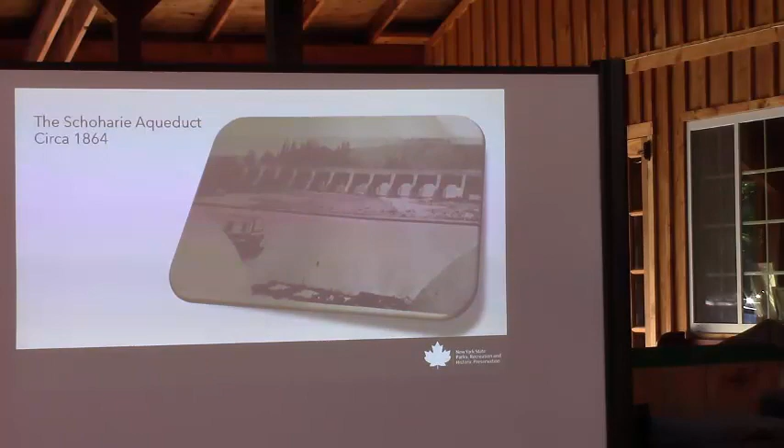The aqueduct was completed in 1842, but put into service three years later in 1845 — I actually meant to look up why that was, it took them three years to put it into service, but I haven't done that yet. It was part of a major statewide modernization of the Erie Canal. It was 624 feet long with 14 arches, the third largest in the Upper Mohawk. The sister aqueduct, the Rexford Aqueduct, was around the same size and dimensions, and there were other major works like this on the canal between here and Buffalo.

We were at a point in saving the aqueduct, and it was critical — we didn't know how much longer the structure would last. It was amazing it lasted as long as it did: six surviving arches, the trunks, the piers. But there was something of special significance to many of us that we wanted to save in situ in particular. I'm sorry the contrast isn't great here, but it's the Otis Eddy stone up on the towpath, part of the capstone of Pier 6. When we get later in the slideshow, we'll see how close that was to falling in.

Canal boats would originally cross the creek on a windlass system, and then there was a bridge that the mules could go across. But having a proper aqueduct and towpath meant no time was lost crossing Schoharie Creek ever again — a major upgrade to the canal system. I mentioned the dangers of the original canal at Schoharie Creek, and there was a newspaper article that said even the most experienced canal boat captains dreaded having to cross Schoharie Creek, even when it wasn't flooding. So this was one of the major upgrades to the canal.

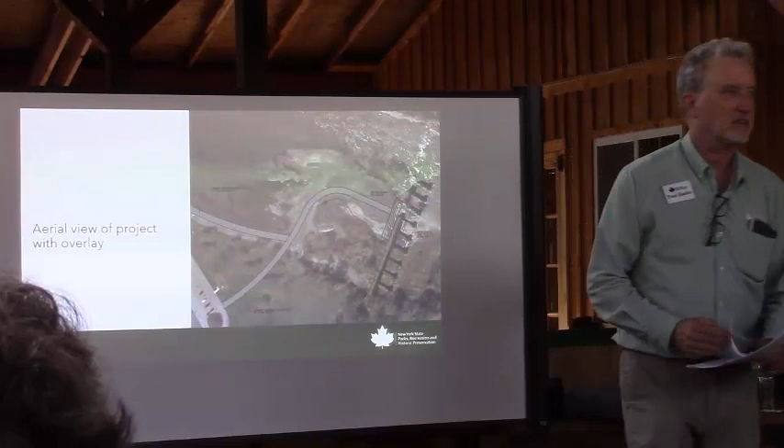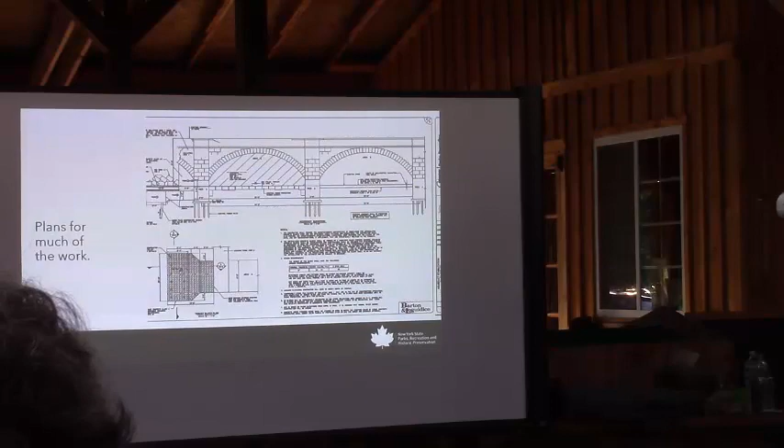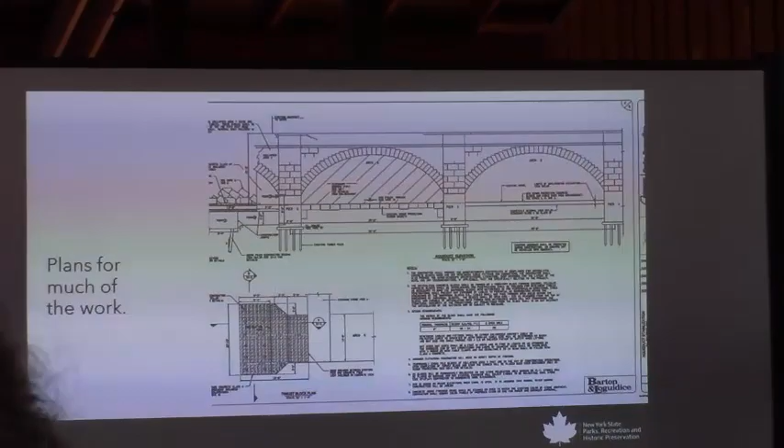Do you want to take it? So, this project—the first step they did was to shore up the arches so they wouldn't keep collapsing, especially on them while they were doing the work. So the first thing they did was support arch 6.

And then they started drilling piles. And they drilled...

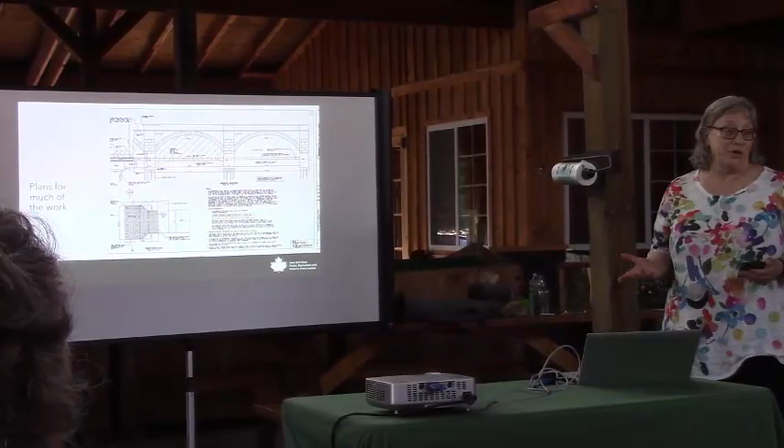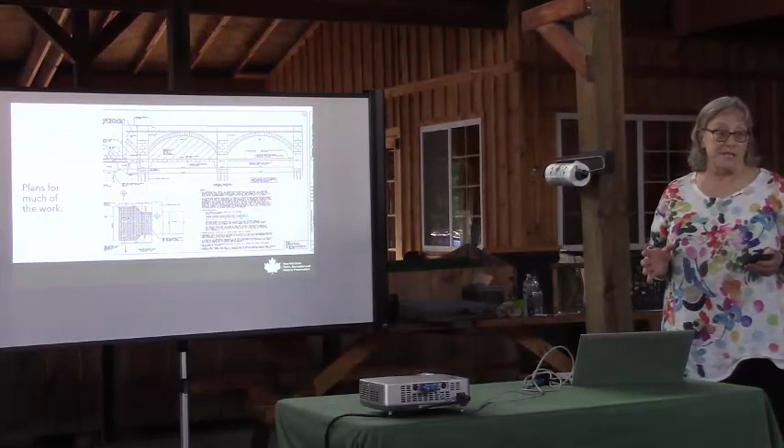So there were original piles in the original construction. Technology has changed a little bit, so they ended up using what they're calling micropiles. They had 12 micropiles, and they drilled those down 65 feet until they got enough resistance. Then they capped that off.

This is basically like building a foundation for a tall building. They capped those off with concrete slabs, and you keep calling them bookends. I guess that's sort of what they did in order to...

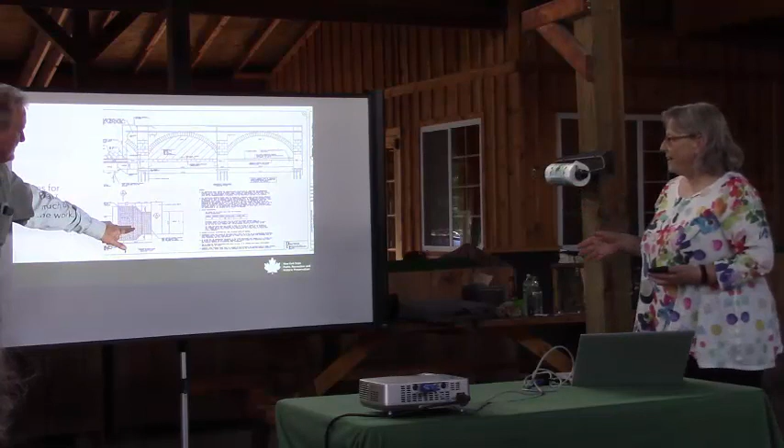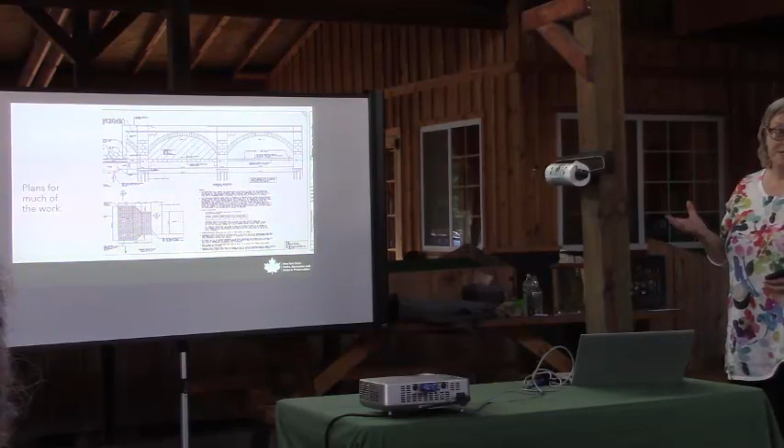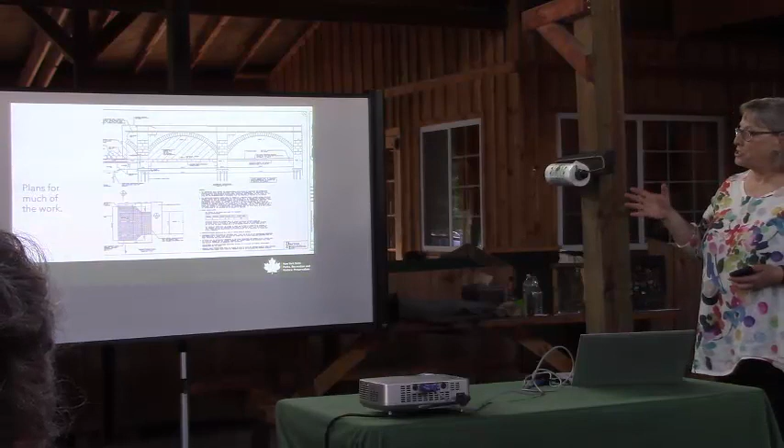They did have a couple problems where one of the pours was too close to the actual remaining arch, and so they moved it out a little bit.

So basically the project went along as planned. They started in November when things were starting to freeze, and they worked through most of the winter, but were able to get it completed by the end of April. May 2nd was when the canal was... we didn't rewater until they were out of the canal, out of the creek.

So there's 65 tons of concrete in these pours. And then that was just the beginning, because then the next part that they did was to repoint the existing structure.

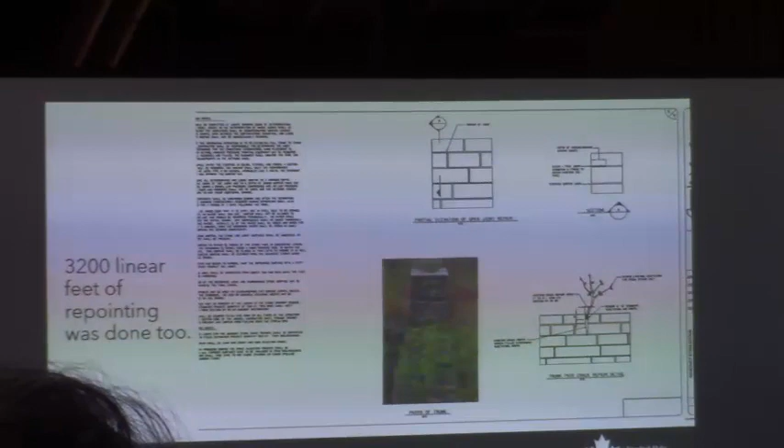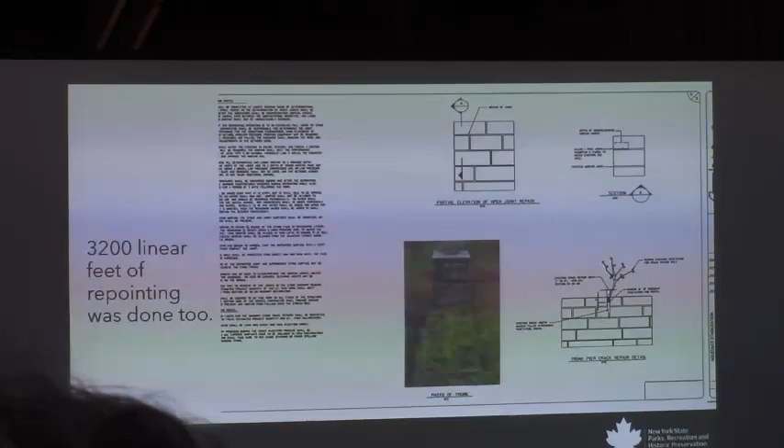The guys that were doing this - a lot of times people don't think of a mason's work. But I said this to them, and I'll say it again today, that masons have some of the best work feelings about what they do. When I get done with a project, I have a pile of paper, and it gets recycled. These guys will have a structure that will last longer than they will. So there's a lot of satisfaction in building a wall, building an aqueduct, building a structure.

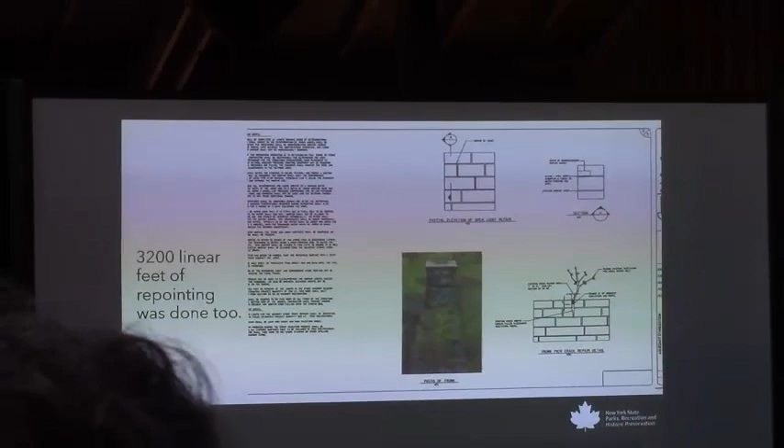These guys took a lot of care. They were really trained in doing concrete work. They said they usually work on a smooth finish, and there wasn't as much satisfaction in that. But I think they got to know the artisans that built this originally, just from physically being with their stone and their mortar for so many months. So really, everyone sort of gave them that process.

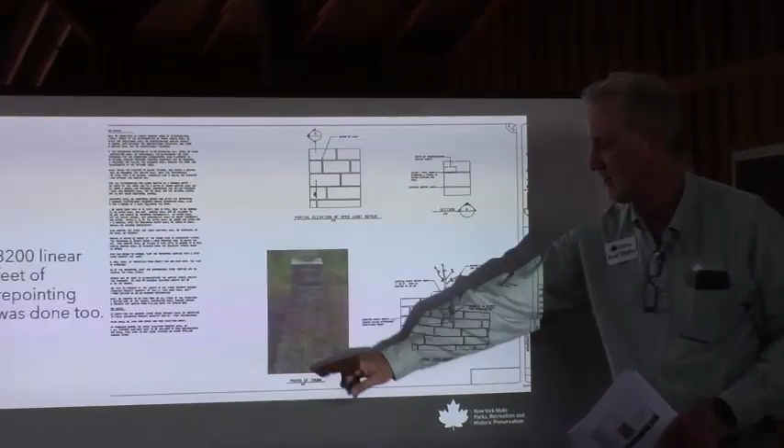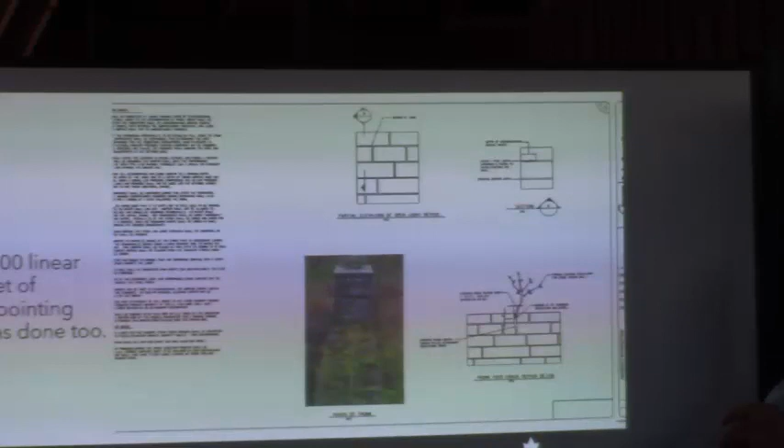So you can see what one of the trunks that held the trough looked like. There's a lot of vegetation growing in here, and they were worried that the vegetation in the center seam was going to grow up and split it out. Various work crews were going in and trimming things back and trimming things back. It was really a losing battle.

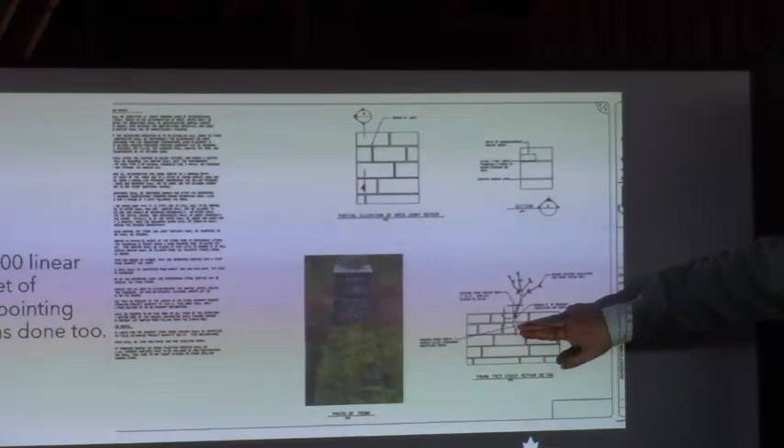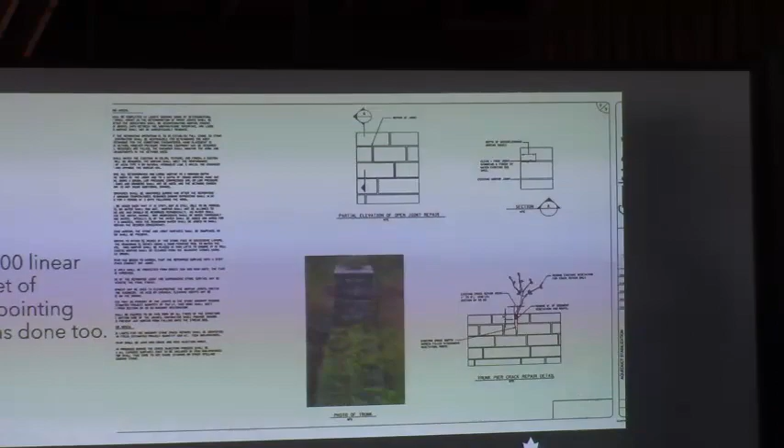The average root can exert 800 pounds of pressure - 800 pounds of pressure from a tree growing. Eventually, you can see, if you just walk down almost any street with a sidewalk, what trees can do to a sidewalk. Well, they're capable of moving stonework pretty easily. So it was significant.

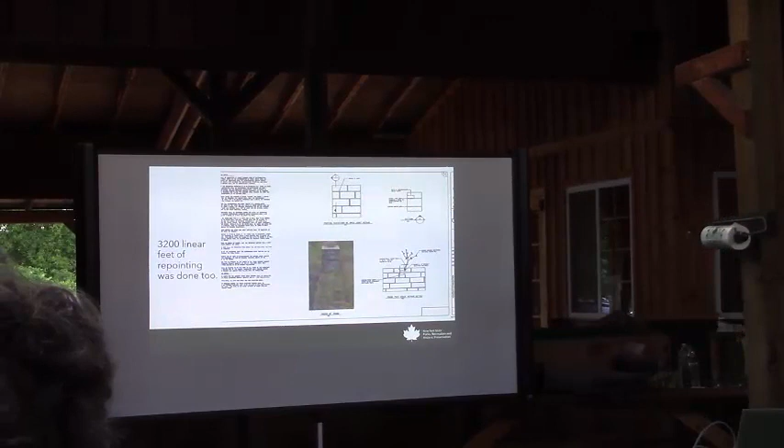This is no small number - 3,200 linear feet. The contract called for 800 feet. The contractor was worried about supply chain issues, so they bought twice what their top estimate of the amount of mortar compound that they thought they would need.

Everything went so well in the project and the weather went so well that they actually had time to use it. Some days I'd go out to the project and there were these 5-gallon buckets of water, and there'd be these towers of empty buckets.

And she's right, the guys loved doing this work. It really meant a lot to them that they didn't have to stop at 800 feet. It's pretty cool when you think of it.

In fact, I invited the construction foreman on the project. He couldn't make it - he's out west - but he really enjoyed it. He said it was the most satisfying project his crew had done in a very long time. Mostly he's working on utilitarian bridges. In fact, what he's working on now is a culvert that he finds no joy in, but they really enjoyed this. This really reminded them why they were in the business.

And give them their due - here are a few of the guys and some of the work.

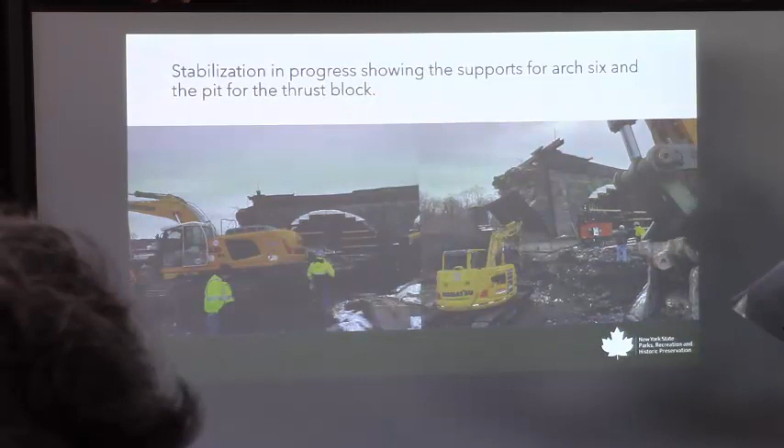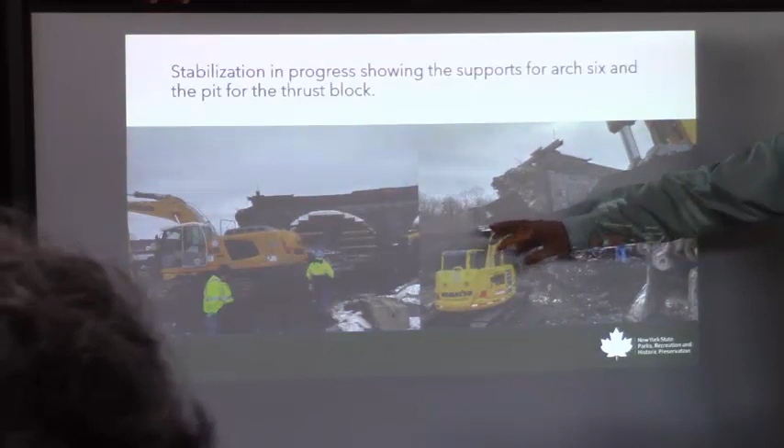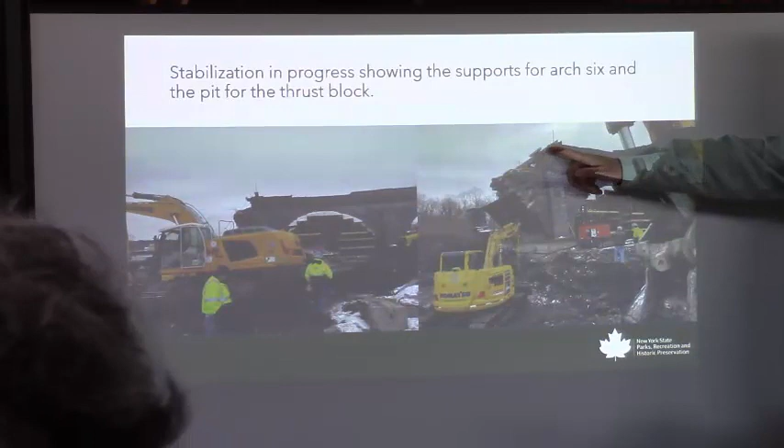And we were worried in particular about this arch, so scaffolding was put into it. Then this large metal plate was put here just over the work area for the micropile cores and the major thrust block cores. This I-beam is, in part, holding up this large steel plate, right on the edge, protected with this bracing system.

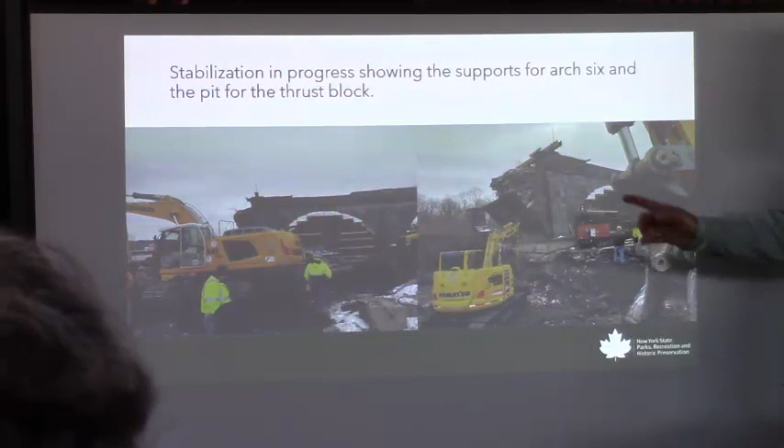Did you guys know what that was? It was a sling, is what they call it - the Otis Eddy sling, protecting the Otis Eddy stone. The Otis Eddy stone was the last stone on the end, the point we protected.

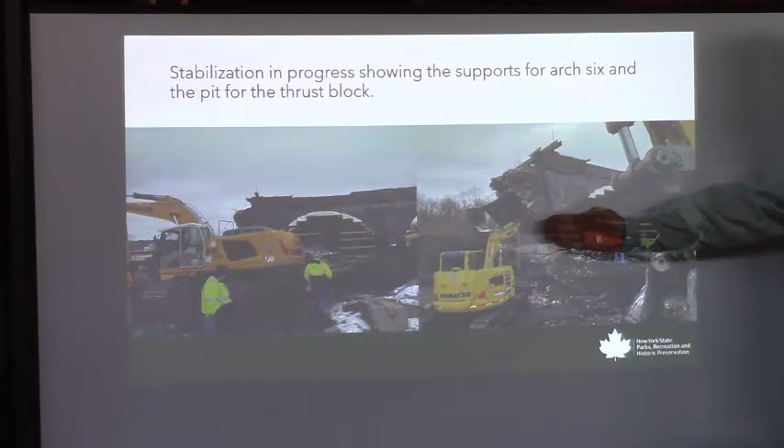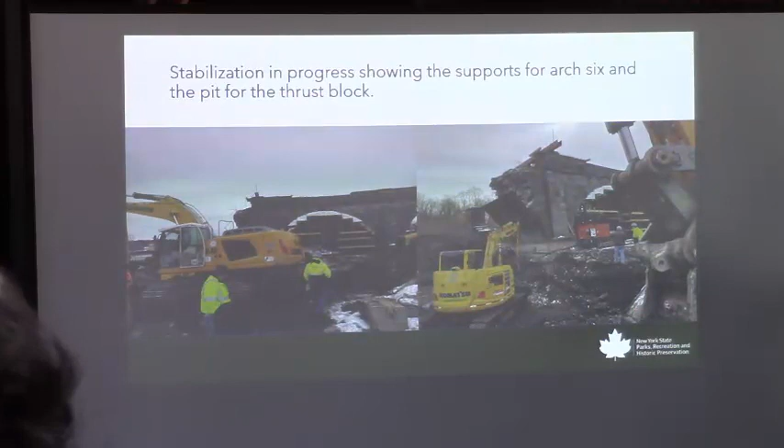And of course, this large steel plate also protects the workers who had to be working in this pit down here, with a lot of major construction going on. They worked in just about all conditions - it's actually kind of a lovely winter scene. That day it got to like 20 below, and they were still up there.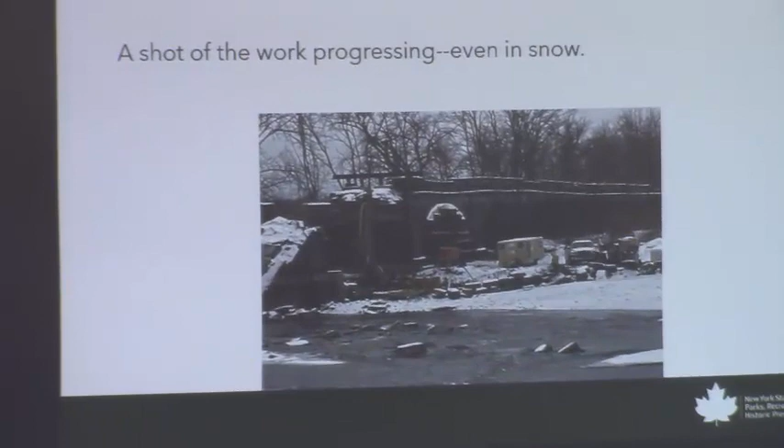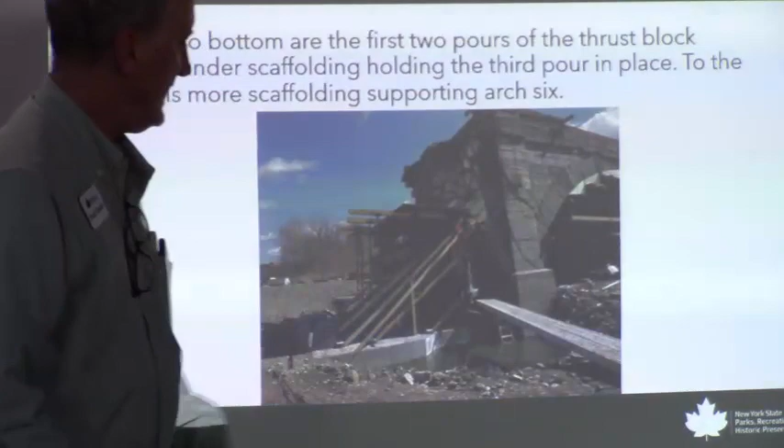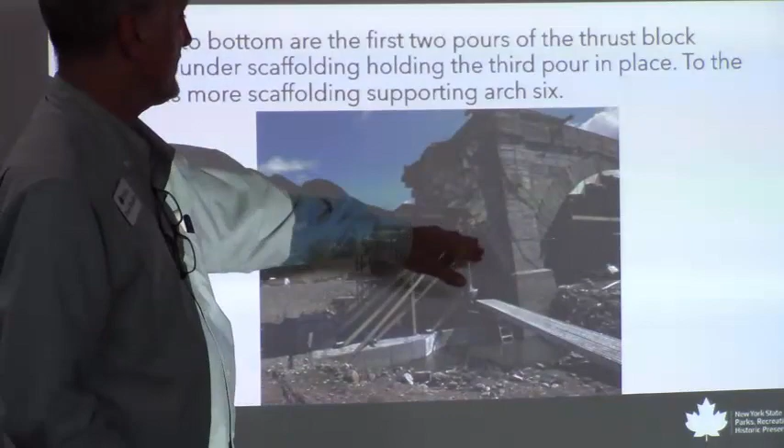So here you can see, right in here, is the first pour and the second pour thrust block. I just happened to be out there on the day that they had pulled the forms off of that and were building the forms for the third pour. Or had built the forms for the third pour - yeah, and actually I think it was curing.

Shortly after this photo was taken, the fourth and final pour of the thrust block was done on April 4th, and as Liz said, 65 tons of concrete.

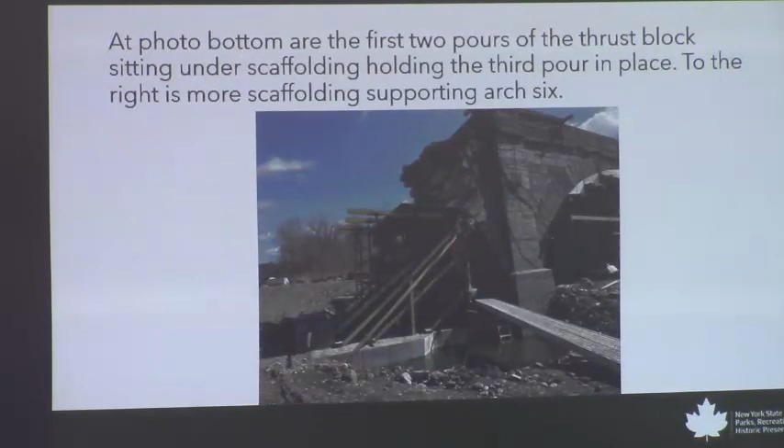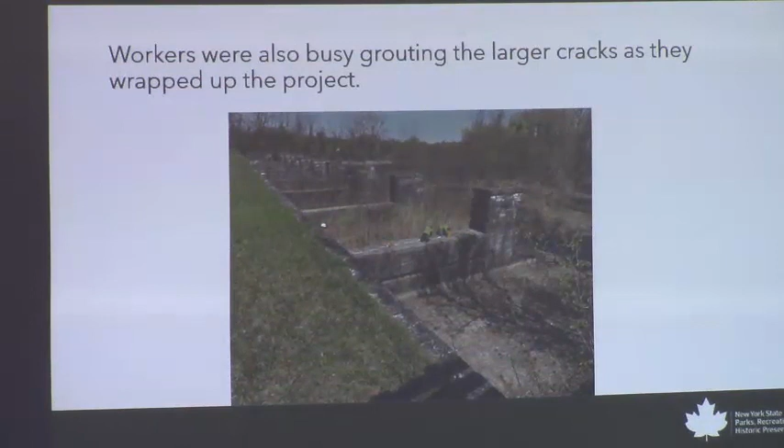And then here are the stonemasons with their buckets of mortar working on the trunks. And there's some massive cracks - you'll be able to see those in a moment. So Slate Hill Contractors did 3,200 linear feet, about a third of the masonry joints in the remaining sections of the outlet. So if you've got a trowel handy and you want to come out tomorrow and volunteer, we'll do our best to grant your wish.

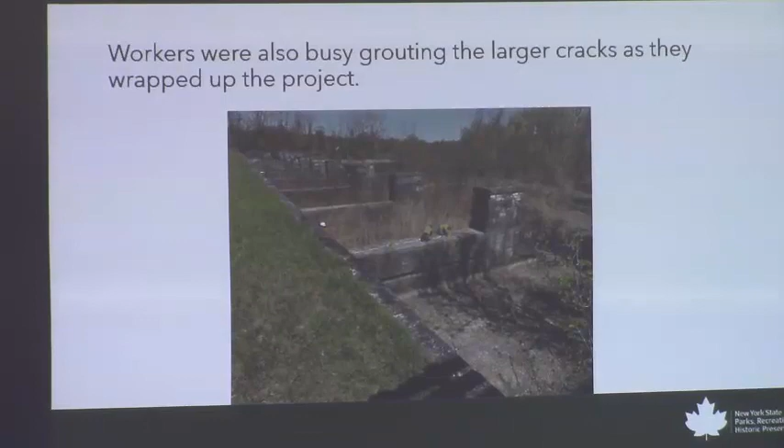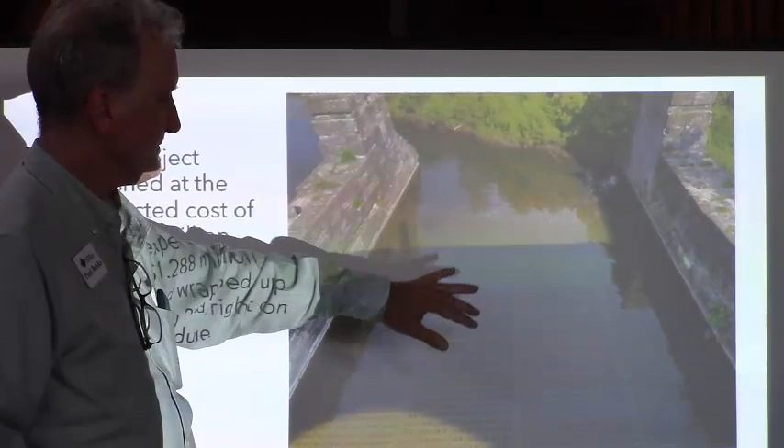Some of the anti-scouring protections that were put in - of course, this is after the canal has been rewatered. But from the towpath, you look down and you can see this brick lattice floor. It's actually held together not just with concrete, but with wire rope - you call it wire rope, I guess that's sufficient. It's all held together with wire rope, and this is supposed to protect this area from scouring.

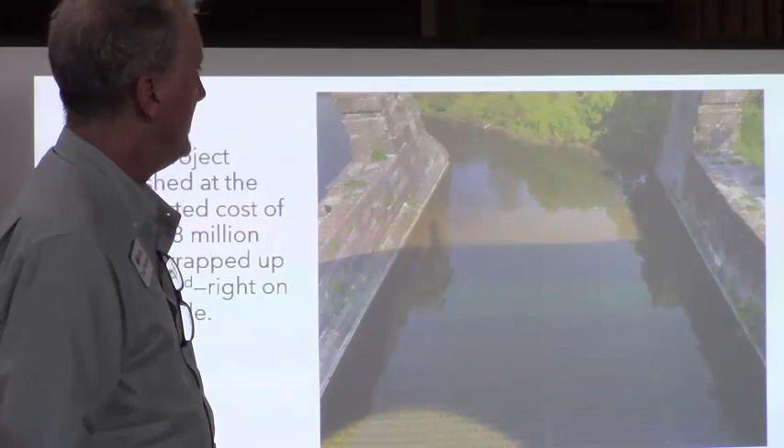At the base of this trough trunk is a lot of stone from the collapsed section of the aqueduct. It was placed around the thrust block, aka the bookend, and around the piers at the base of 6, just to help protect it from floods and trees and everything else. We can get another look at it, and you can see that's pretty tiny compared to all that - it's a lot of grout and a lot of stones.

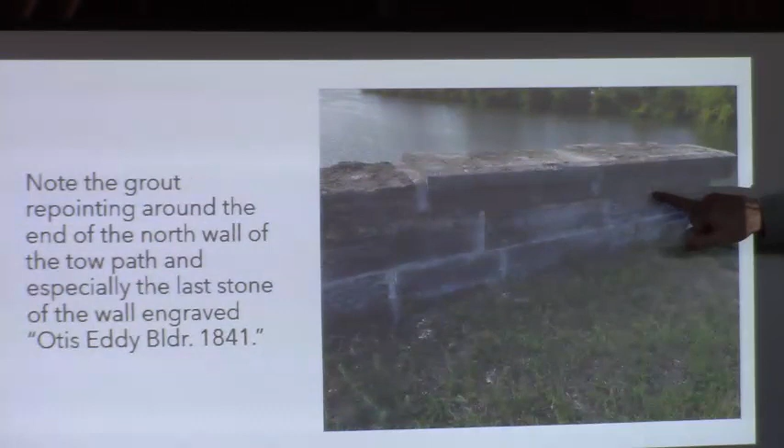And of course, on the right side of the slide - Otis Eddy, builder, 1841. It is literally the last stone on the structure, as you go east. You can see that he also repointed significant sections of the retaining wall on the towpath.

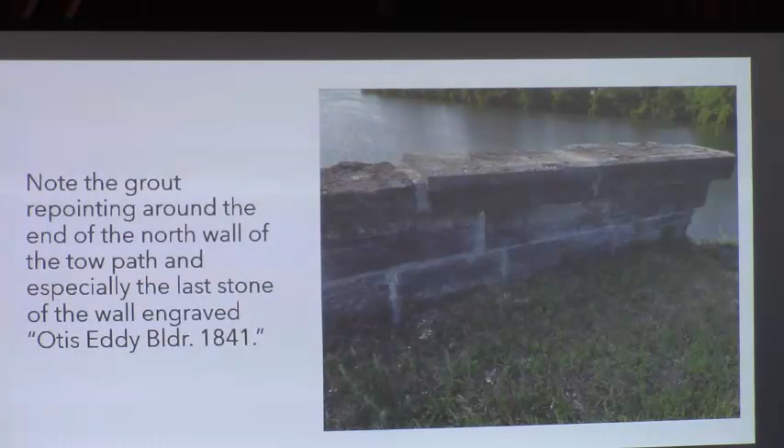Unfortunately, so much of the structure had already collapsed that we had plenty of extra stones from the creek bed, and so 40 of those were chosen. One of the first things I was told as a site manager about this project was, oh, you're going to have to figure out what to do with those 40 stones. And I was like, put them back.

And all of this, I'm actually going to be working with our natural resource officer so that we can clear that in the off seasons, so you can actually see the aqueduct. We did that project. Was it here last year? We haven't cleared it in 2019. So we're going to have that done in the off season.

There's also a nice bench looking out to the north where the Schoharie Creek meets the Mohawk River.

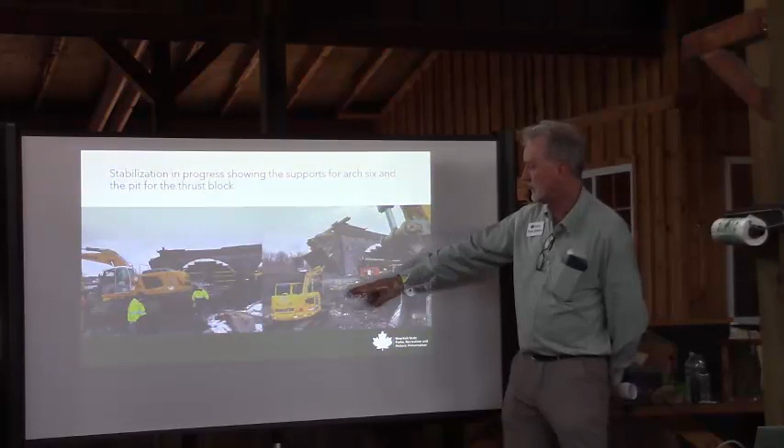So the thrust block comes up to about here - it's holding up all of that. Underwater right now? I mean, you're in water right now. Yeah, no, the water only comes up to about here. You can actually see the top of the thrust block sticking out a little bit. But I don't know what was done on the end cap here to support those.

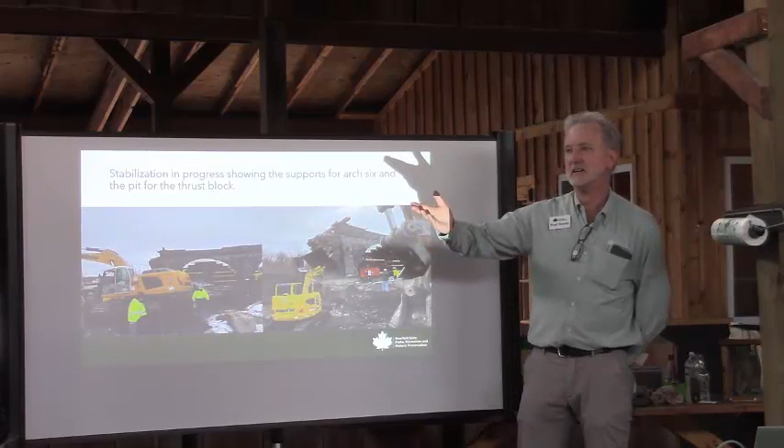I at one point thought to ask why the thrust block didn't go all the way up, and I was told so that if at a future point they do come up with the money to put a bridge across, they can just extend out from this point. But I didn't think to ask the right question, and you did - I'm sorry I didn't. I'll give you my card, and I'd be happy to try to find an answer to that.

Yeah, I mean, do you see anything in the plan yet? Really?

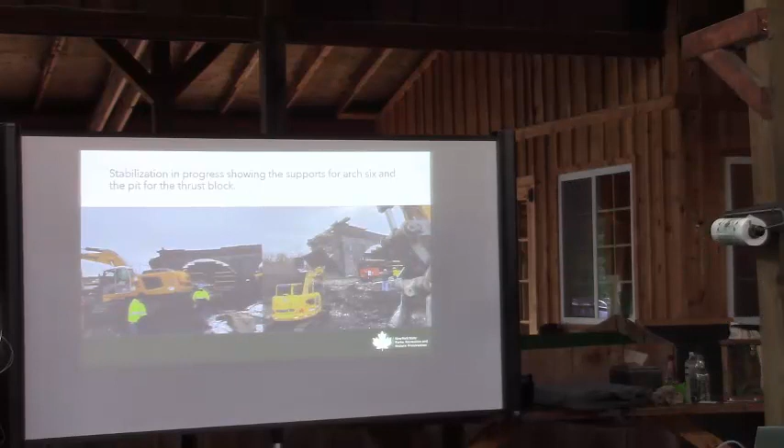What's next for the aqueduct? Oh, for the aqueduct?

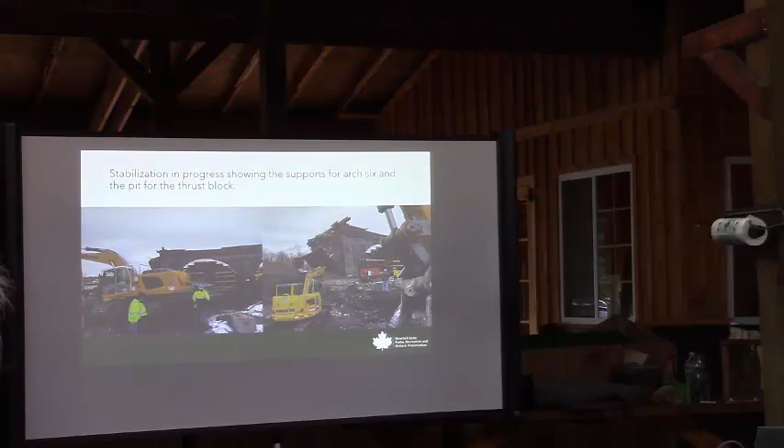Clearing the brush around it so you can see - that's next on my plate. Giving those limited tours of the aqueduct towpath. And mind you, I do have to issue this disclaimer: just because we are offering aqueduct tours is not a guarantee that on that day we will be able to go on the tour.

Yeah, they go up to like right here. But above that...

Any other questions?

I read something about them redoing or adding interpretive markers or displays. Is that in the works? Or new signage near this? Yeah, so there was one interpretive panel approved as part of this project, because we're redoing all the panels next year. They only approved one for now. When you say all the panels, you mean like the whole park? The whole park, yep.

Our education program doesn't go on this side of the creek. They only go to the overlook, which is the anchorage for the aqueduct, on the east side of the creek. So we're putting that one panel there so we can better explain to school kids what they're seeing out there. When we redo all the panels next year, there will be more panels going up top, including the one on the east side at the anchorage overlook point.

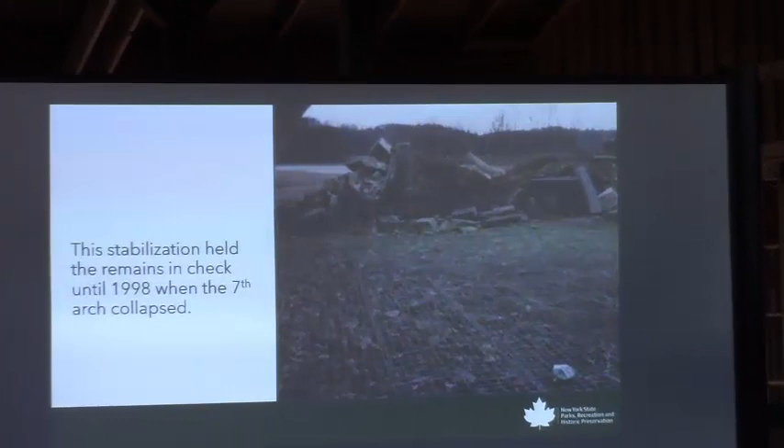No, you're talking about the new one here. Right, this is the old one. Yeah, as I was preparing for this — is it true we used to replace those on a regular basis? Yeah, cables. No, okay.

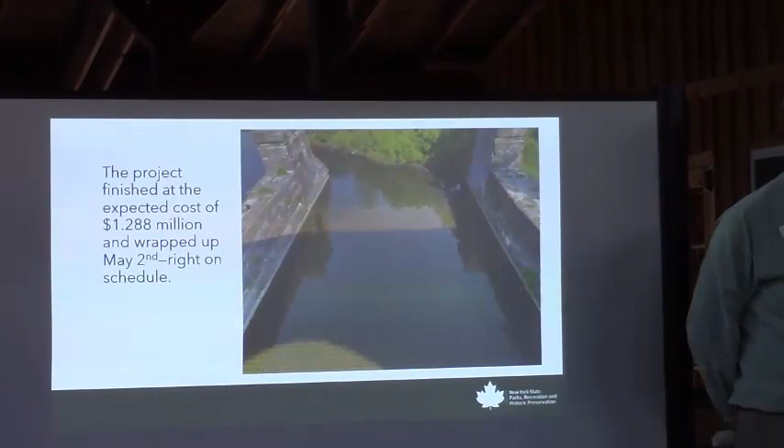Then pointed out the bed — it's right there, yeah, this is the bottom. This is what they just did. Yeah, there's a wire — it's a resin mesh. Well, it's a resin, and then it's got some sort of cloth material, a wool material.

Oh, I should have written this down. I'll send it. That'd be cool — we could have passed it around for showing. Yeah, what else do I do? If you were at the last Friends meeting last month, we passed around a mule's tooth that was actually found.

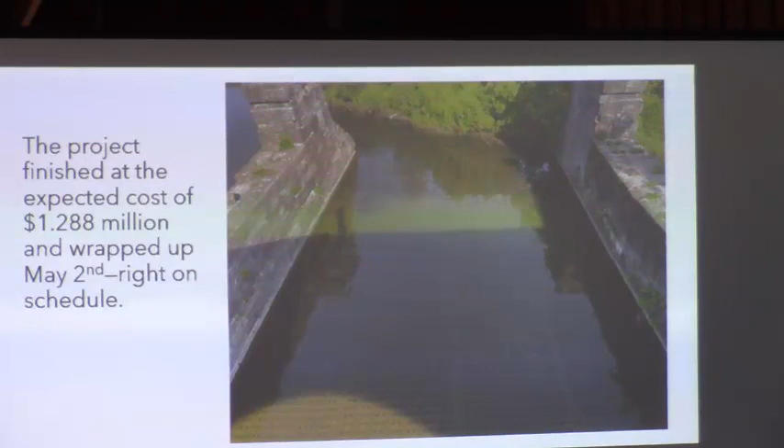Oh, they found it right there. Oh, yeah.

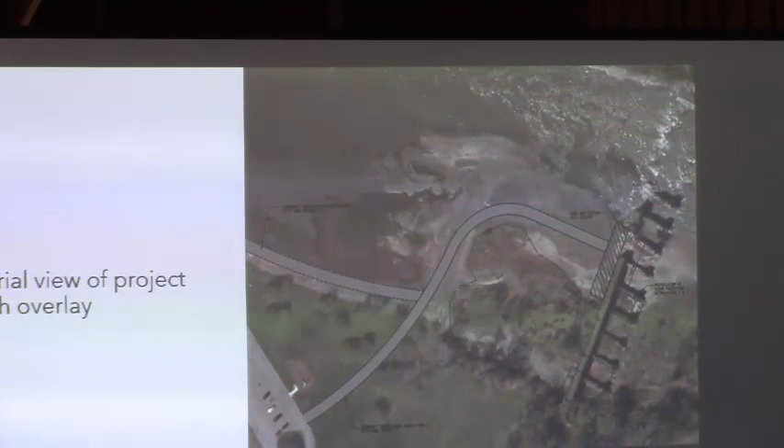The guys that did the masonry grew up on a farm, and they knew a lot — they had a lot of interesting history. They were told, when asked what they ate growing up, that it sounded like everything. I thought they'd be here — I thought the ice cream alone would bring them.